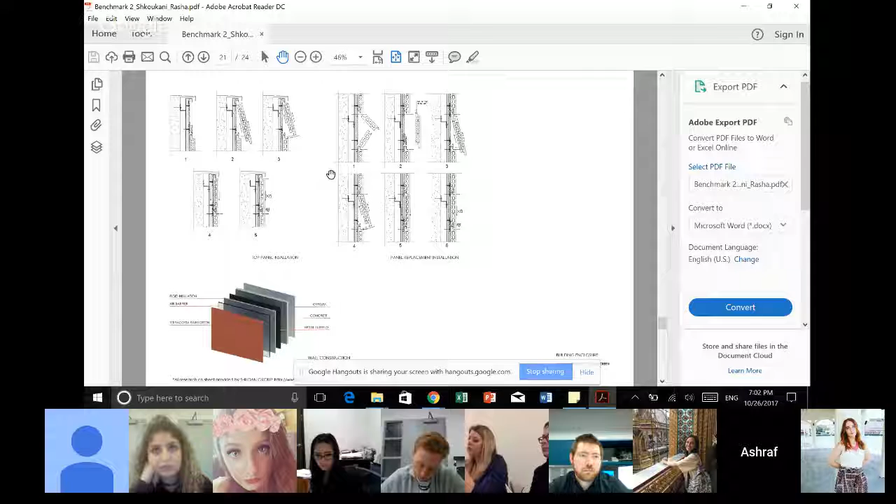There's a range that it can be in. It looks close to me. And then I don't know how you safely egress off the side. Like you might have to consider the distance it takes to get from inside the courtyard of your building to actually outside of your building.

And the door is going into the stair. If this is the bottom level, or the level you can egress, it probably needs to go in that direction. And then your landing on the left side might also need to be a little bit bigger.

So if all that works or not, I don't mind your parking configuration. It makes sense for the cars that you have.

But on the parking plan, the stairs, for instance - like we spoke with Paige - they don't have doors. So it's hard to know how you're thinking of the stairs. Some indication that there's doors, some indication of what you're thinking when you look at the ground floor plan. But then we see that the doors are swinging in the wrong direction.

Actually, I'm screen sharing now. I understand, Rasha, that these difficulties in your garage are due to the strict, I would say, if you want to use a flat plate, the efficient range is between 7 to 9 meters, which is around 27 to 23 to 30 feet, or exactly 29.5 feet. So I understand your pain here.

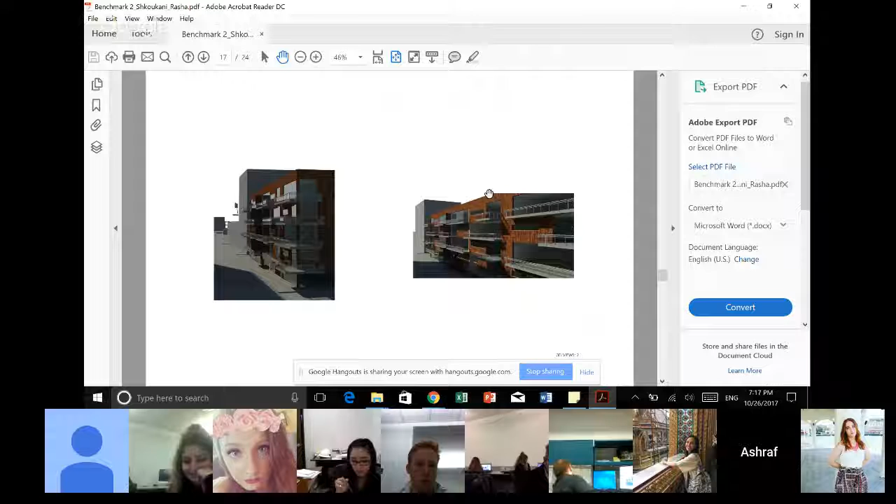However, you managed to have a very nice looking building. I would love to live in one of these if I'm living by the Nile. That's wonderful views here, so you solved this very well. I wished you could have elaborated more on the terracotta.

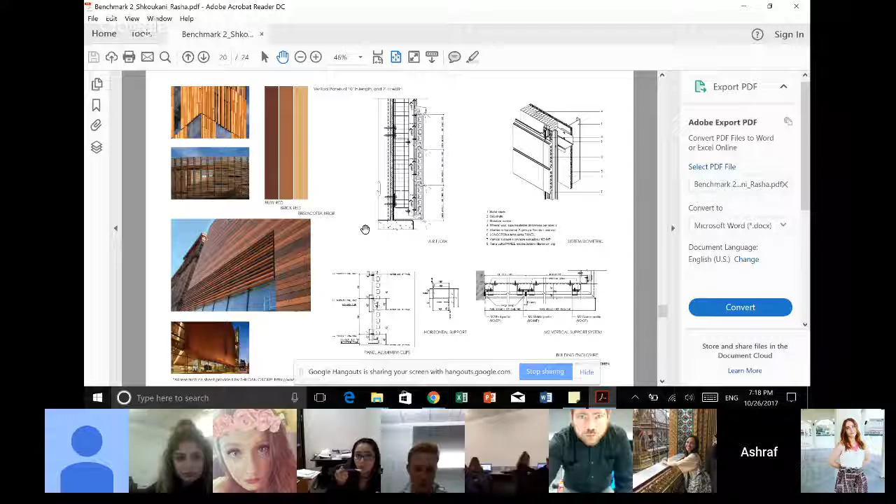You need to show me the drainage of these horizontals, and I can see here that that's the right one. That's a steel stud. I'm not sure if you're going to decide on putting batt insulation inside. That's your rigid insulation, around 2 inches. That's correct. I love the color scheme very much, but I would love also to see it on your 2D elevations here, right?

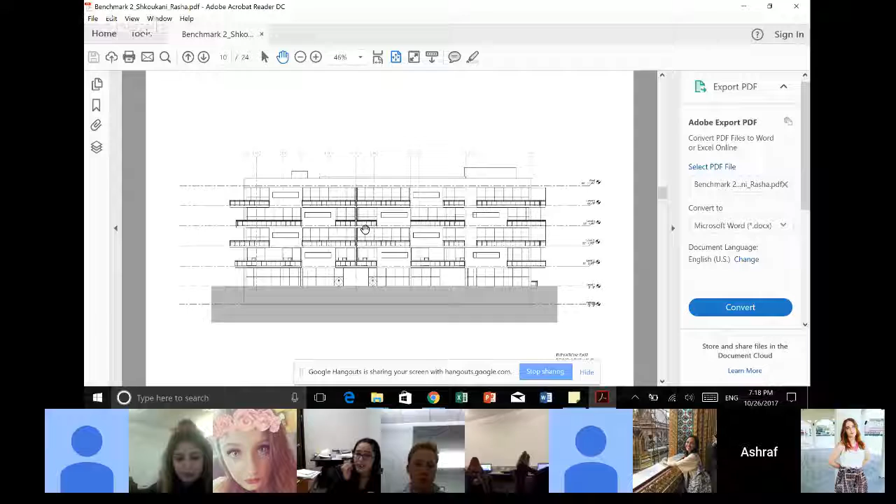I think this makes up a good project. I don't have any problems with the cantilevers as long as it's concrete. Well, slightly weird a little bit in Michigan because of snow and all this kind of stuff, but absolutely gorgeous seating, view, and time.

Starting April to September, October or something. The HVAC, I'm not sure how you're going to bring the duct from this mechanical room. I don't see any spacing here. Probably you've got to find another place for your meter rooms.

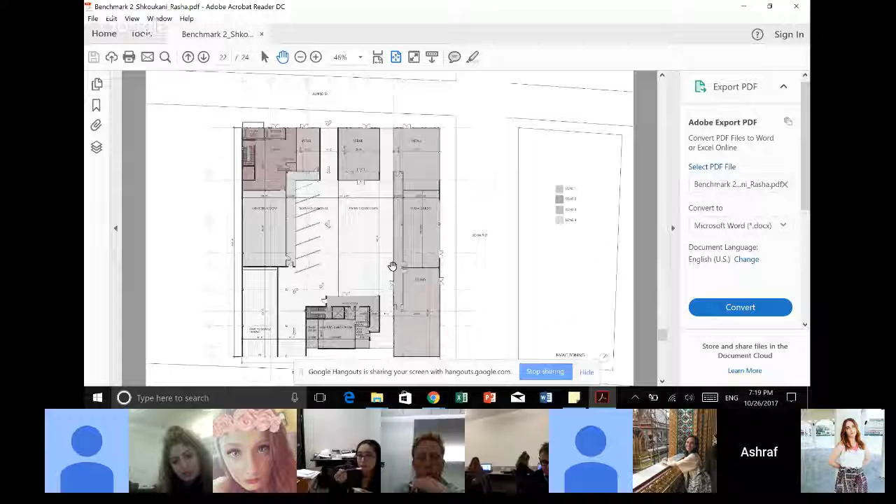Zoning at the end, you did do one zone for the exercise room. You have kind of too many here, like 4 VAV boxes for each zone. It's kind of hefty, okay?

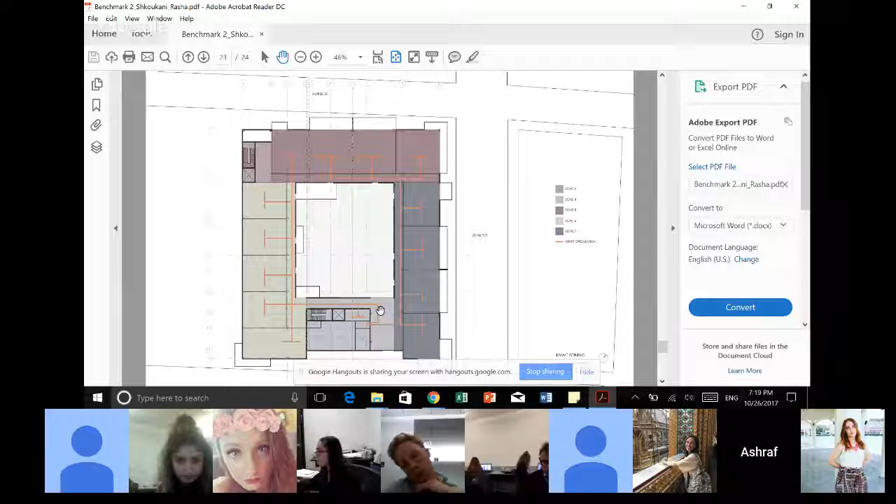So I would love if you can reduce the zones here on the first floor. These, again, 4 zones is still too much. Rasha, I would do 2 Ls here, okay? One is this one, and the other one is this one, probably. So north and east, south and west, that's the best orientation.

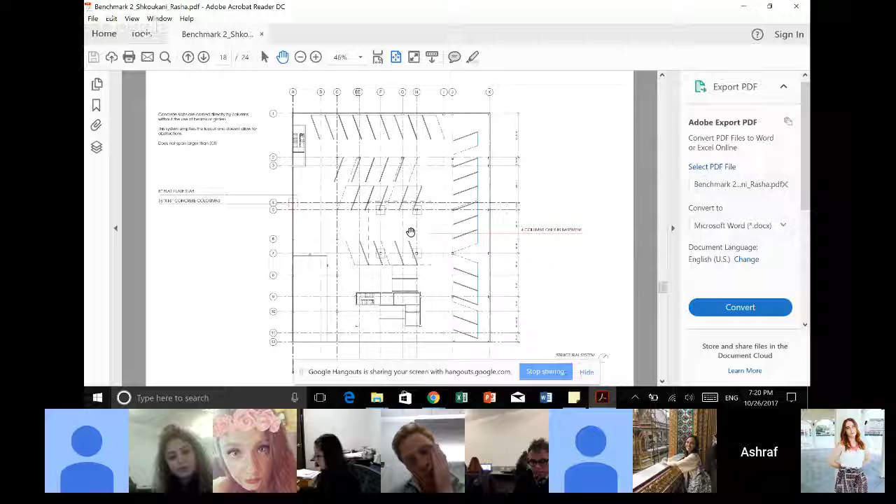And what else? Just wish to have more of a wall section to discuss the code and ASHRAE on it. Your structural plan, I'm not sure if these are beams or there are no beams here in the flat plate, okay? So I'm not sure what these lines represent in between; you simply have columns and the outline of your slab. I hope you can put some thicknesses if possible. And nice 3D graphics. Thank you.

Rasha, do you want to talk about the structural slab drawings? You want to clarify that for us? Yeah, I'm just...

So yeah, there are no beams. It's just flat, because I was doing research on the flat plate slab. So because I didn't know if it was an embedded beam or if there was just no beam at all. So when I was researching, there's no column—why is this slab this thick instead of a thinner slab?

So I've not used the word flat plate slab before. Is that post-tensioned? No, let me clarify this. It's not—it's a site cast, on-site cast concrete mark with 8 inches. This has no beams, just compensating for the beam.

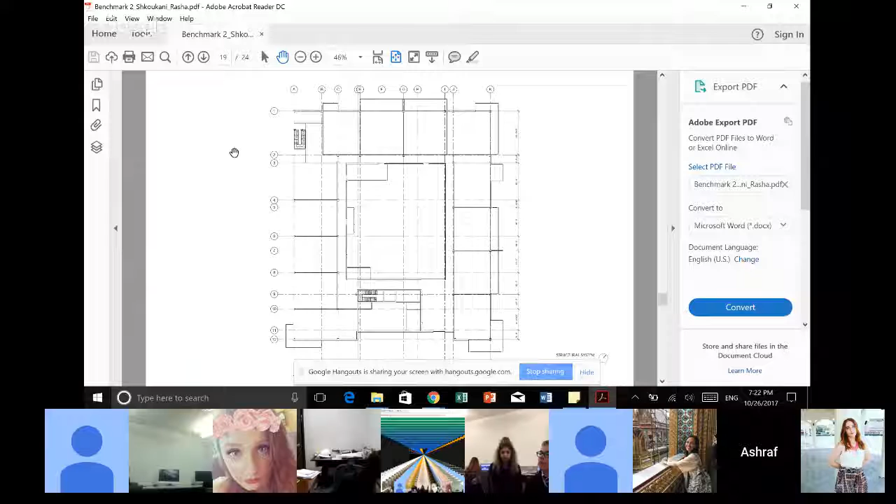If you have really a regular squarish bays of concrete, this will make your life—I mean your structural engineer's life—easy. It should have square columns or circular columns, because rectangular ones are not ideal due to moment of inertia on both sides, lateral forces, stuff like that. So they act like diaphragms for your floor slab.

Do the columns have mushroom caps? No, that's... okay. There is a difference between flat slab, which is the one with the mushroom or plates around the column to resist punching forces, and the flat plate, which is just one plate thicker than the flat slab. So there are 2 systems here: flat slab and flat plate slab. So she's using here the flat plate slab. This is why she was restricted. However...

Any structural engineer, Rasha, will ask you, okay, for the first floor, or the ground, the roof or the ceiling of your garage, to be done as beam and column. Okay, that's for more of a fixed moment analogy with the steel connection. So you do have more rigidity for your building. So you will be asked to have a beam and regular slab on your first floor, on the garage floor.

Other than that, I would love, Rasha, to see a 3D of the slab, kind of an inspirational photo, like what you did with the terracotta. This is very, very helpful to our final jurors' explanation, to explain the concept and show what you're trying to say here, not just a structural plan like this. So it's better to have more of 3D sections and a couple of inspirational photos like what you did with your terracotta.

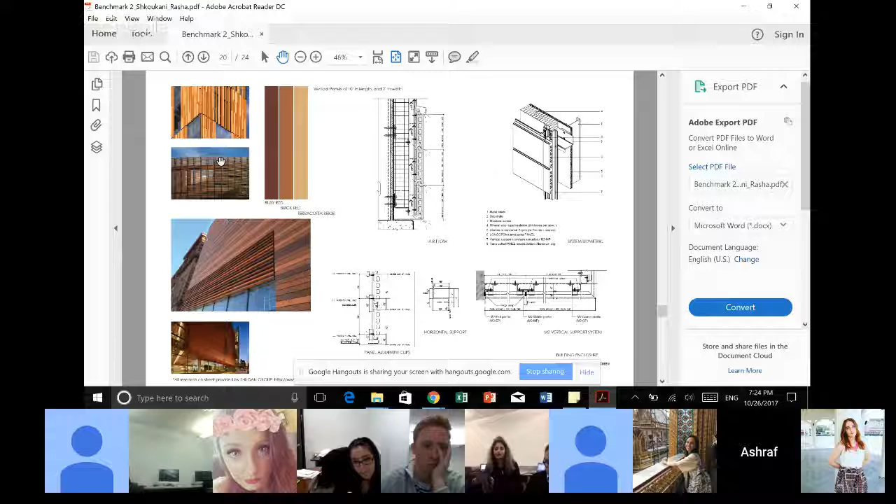So for my basement, because we talked about this, I recall the basement has an embedded beam, so you don't actually see it—it's within the floor, the concrete. Well, I know that beams bother us a lot, but if it doesn't... again, this is a structural issue, so don't worry about it. I'm just telling you because I see here the progress, Rasha, in transferring a good design of some sort. Again, I'm having some issues with these wide balconies.

It's more luxurious for Detroit, but I'm so happy to see the development of the design with these systems in mind, especially the structure and enclosure. This is really what we are looking for. When I see you maturing like this, it makes me very happy.

Don't worry about the basement floor, but I'm telling you, you will end up with just a regular beam and slab here, which isn't a problem. You have a very nice structural plan here, base, almost squarish, less than 30. That's a heaven.

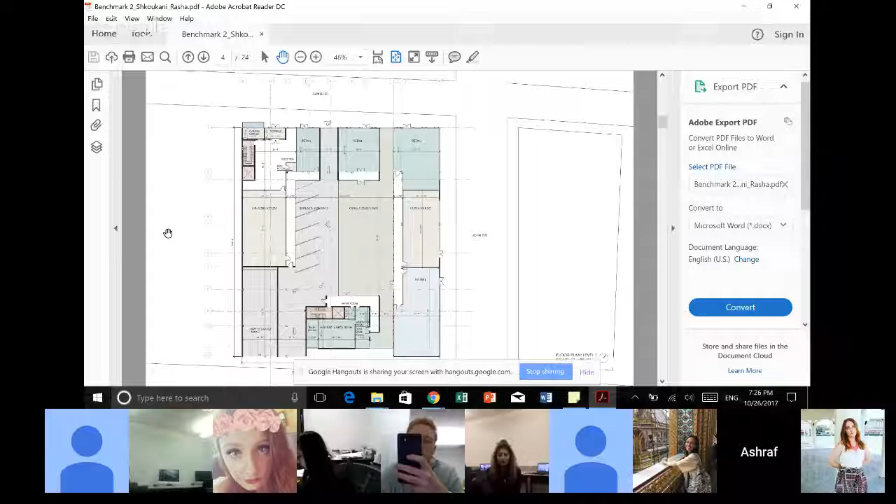I'm just a little unsure as to how to actually show it in my plan, to have my structural system be clear. We can do this together, don't worry about it. You mean the structural floor plan here? For this floor, yeah, but for that floor and the residential floor I just want to make sure the jury understands.

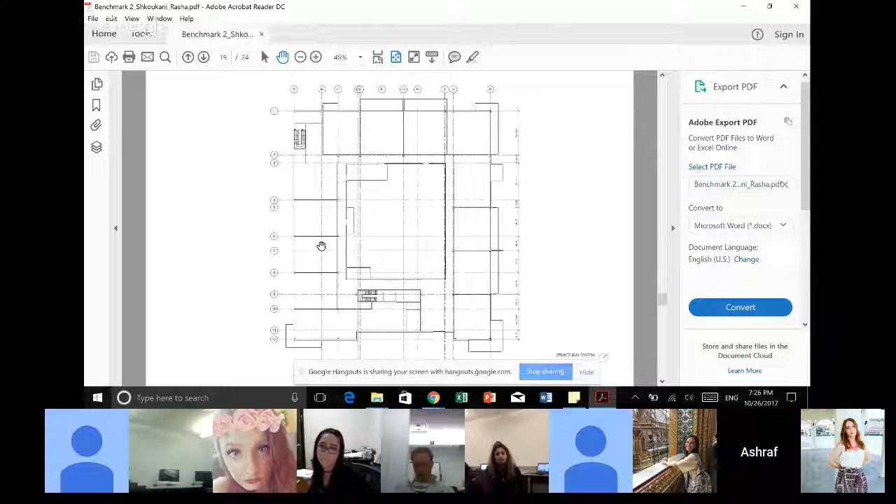No, the residential floor is good. Just show the columns, no beams here. Okay, and add some explanation.

3Ds, axonometrics, or whatever for this construction type, and make it clear that this is a flat plate slab. You just need to add some illustrative photos here for a kind of analogy or inspiration.

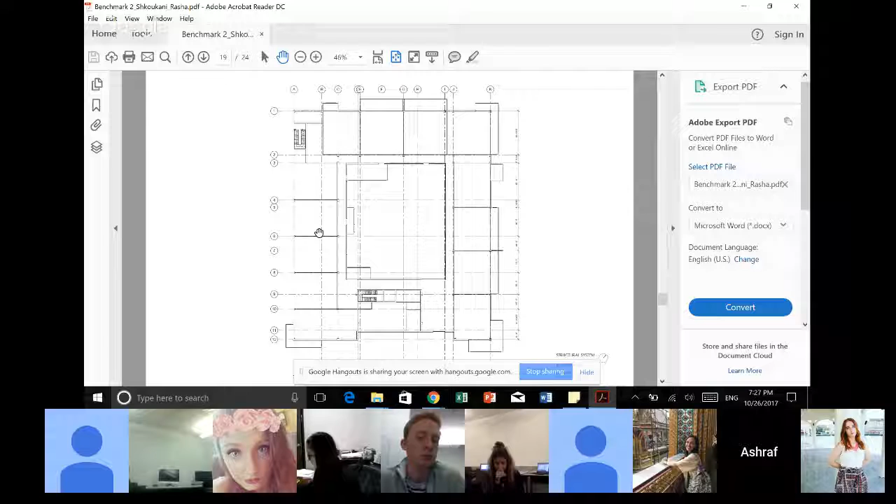Concerns about the first one we can do together. That's fine, that's an easy task.

I was researching it, and a lot of pictures ended up showing what you were talking about. I wasn't just looking for that, so I might end up having to make it myself, because I think what's more popular is the mushroom cap as opposed to the flat.

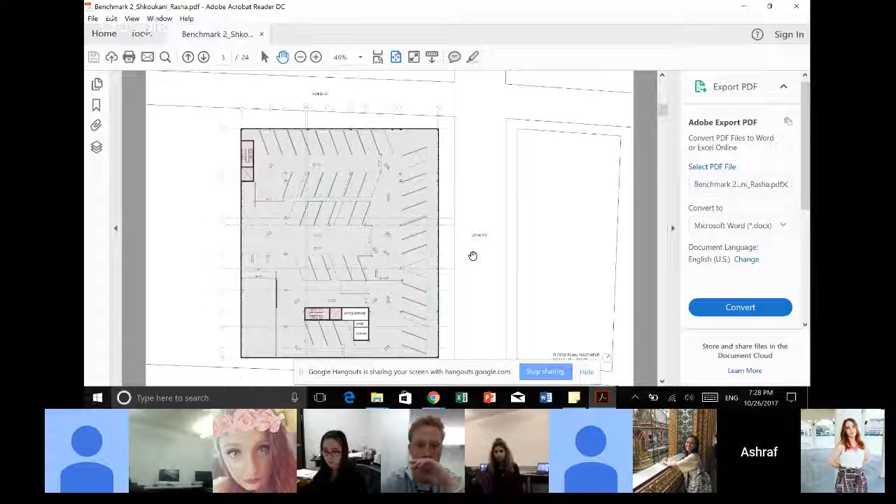No, flat plate is different from the mushroom cap. There are too many embedded systems. There's waffle slab, there's flat slab with the mushroom cap, there's flat plate, there's what we call ribbed hollow block or ribbed slab, which uses light blocks to save on the concrete. So there are too many of them, but that's a legitimate system and works very well here with these regular span distances.

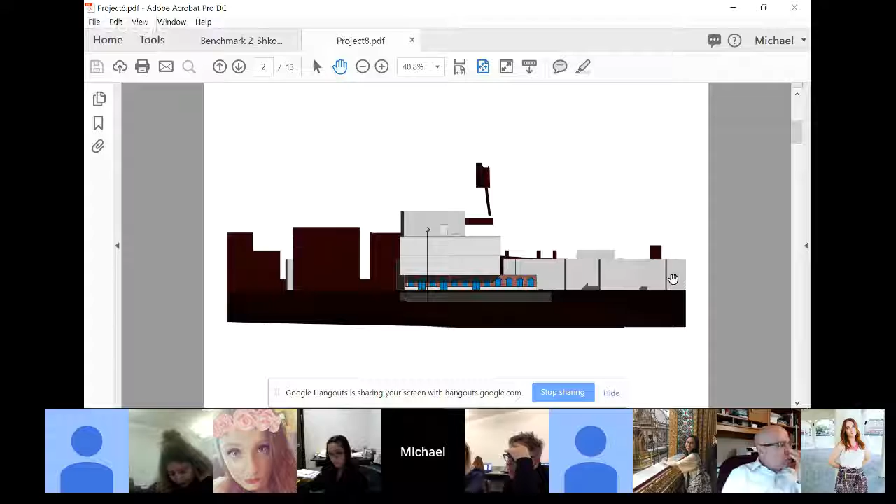So, first elevation, this is looking towards Woodward right now. The top 4 floors are all of one construction, a combination, and the bottom is where all the retail and other spaces come in. So it's created differently, and you can see that through all 4 of the elevations.

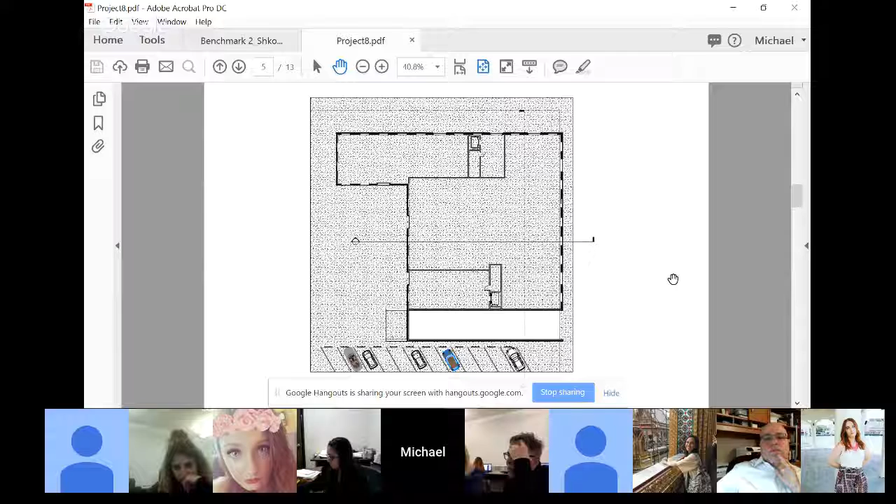If we go on to the floor plans here, the floor plans are very open, with flexibility of space. I need to adjust my staircases since I made some changes to the upper floors, they're not going to work for egress.

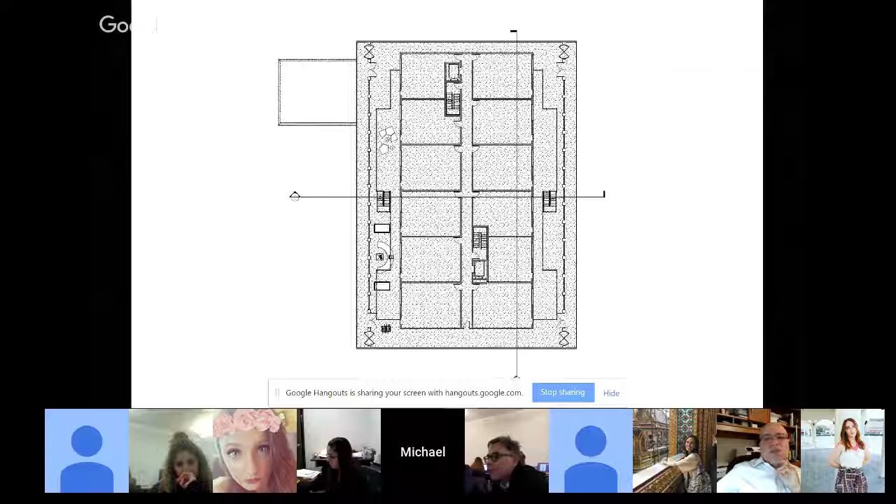If we go to the first floor plan, or the second... Mike, could you please indicate the page number when you talk? On each slide, I can follow up with you on the page.

On the exterior of these rooms there's a very large atrium that you enter through. It would essentially be the front door to the apartments, and creates more of a community feel.

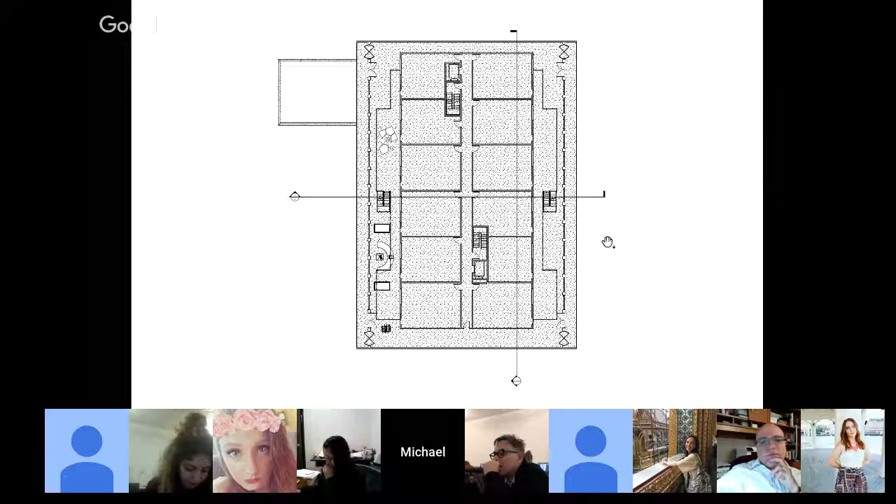My current plan going forward is to take these 2 and bump them out to the outside of these units, and then this hall will be completely erased. It'll be replaced with one wall that in section will be vertical and support.

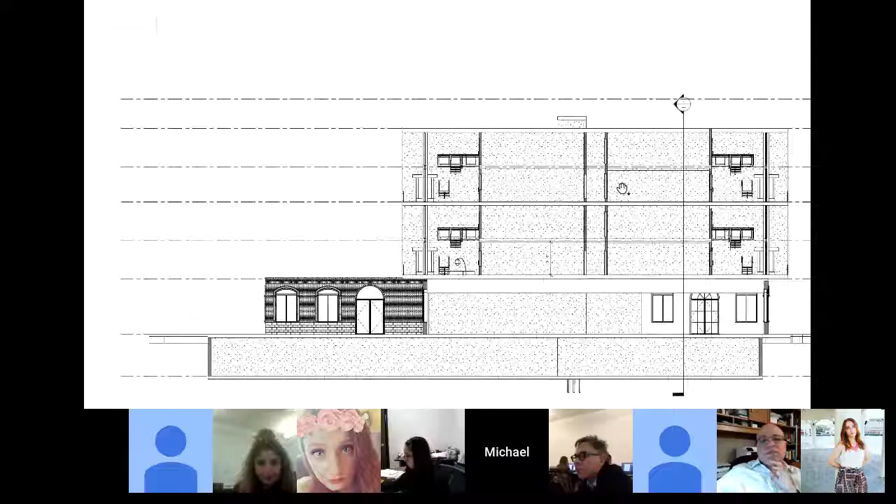If we move on to the sections here, the first sections, you can see more of the space that I'm talking about. You can see 8 units in the section, a hallway in the middle of all of them, and then on each side is an atrium space.

No matter what floor you're on, you have access to an atrium space that's not only shared with everyone on the floor, but also everyone on the floor either directly above or below you. The structural system now becomes a lot simpler.

I don't know about that. It was just a thought, but it...

Gives you the opportunity to create a balcony space, this atrium space that's all shared. I guess it's not a mezzanine because it's not a half level, but the interior balcony, I suppose you would call it, inside of this curtain wall.

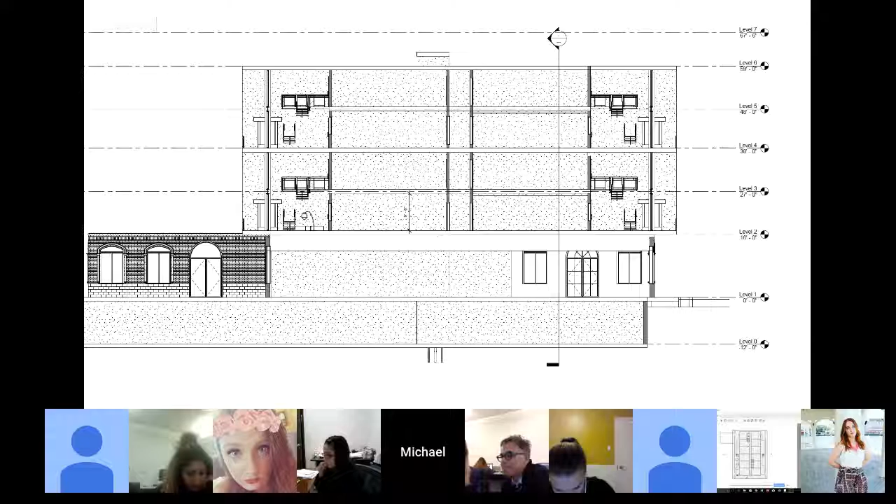And then columns line up directly with the walls on the first floor. So all of the load from that would be transferred and then eventually into the structural system. But it's all a very square grid, so even though it's not fully worked out, it shouldn't take too long to do. And then there will probably have to be a column in the middle of the hallway.

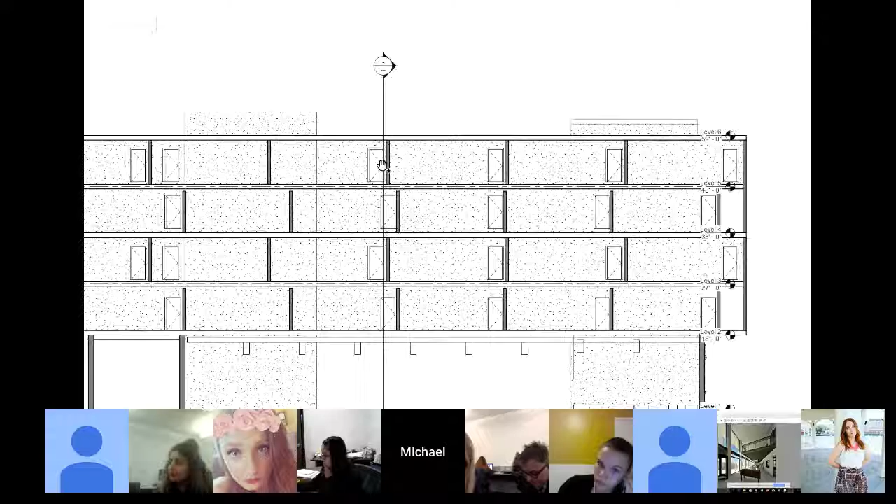Moving on to the next section here. This is a section through that hallway, I believe. No, this is a section through the rooms facing east. So it's a section facing east.

So it hangs on each side, but they're not incredibly long, so they're going to be cantilevered. Entrance to the left.

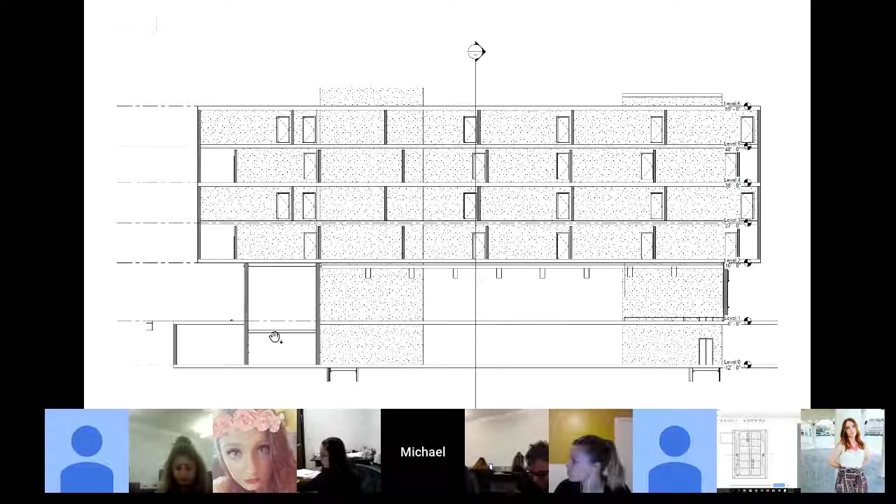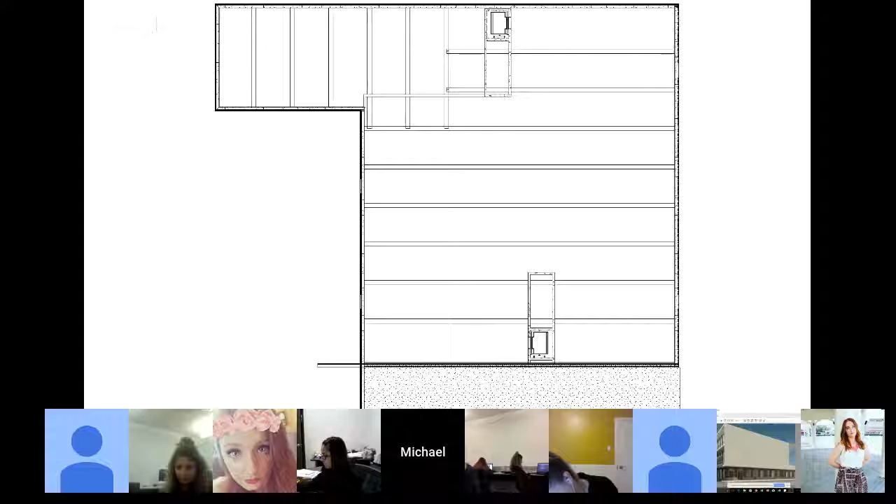Is a quick look at what this atrium space could look like. You can see on the right all of the rooms. So you come in, you have space to get to your room, and it also opens a sense of community.

And since we're building for baby boomers, they're most likely going to be coming from home. The thing you often miss in an apartment is the ability to have a neighborhood, to have a community. You get these tiny homes that they're doing for homeless people. They aren't putting kitchens in because they're making community kitchens, so people interact.

And with this forcing you to interact, you get this very nice space, this double height space the second you walk out of your room. Lounge there, you can go up to the window, enjoy the sun, go up to the bean bag. And so it's a way of re-envisioning the hallway.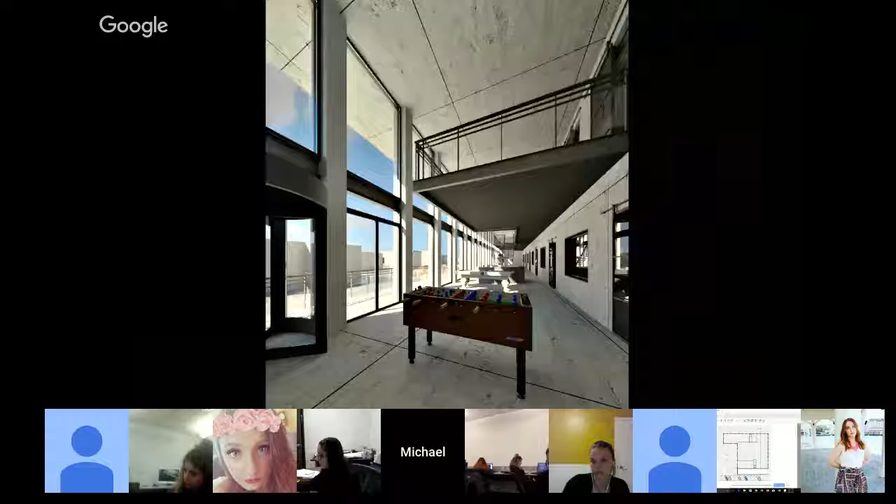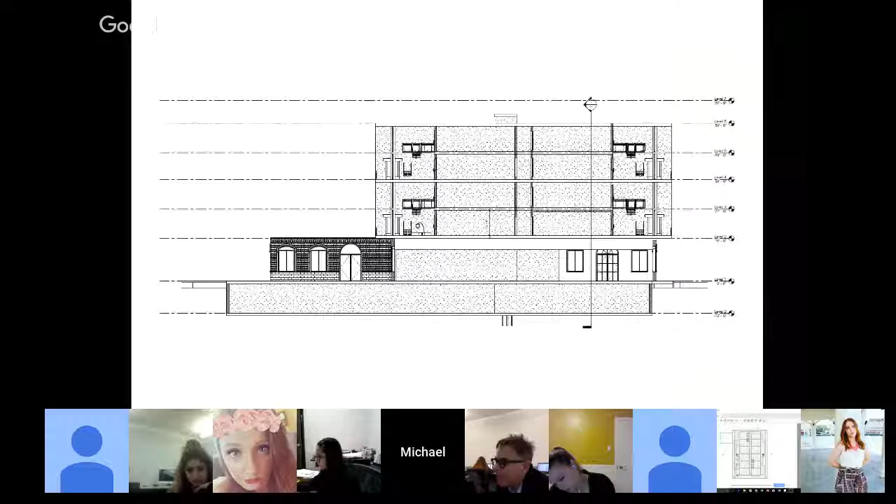So you have this open volume to the other side on each end on the first floor. You can see that from the first floor plan. Access to both sides. On the second floor plan, it goes straight into it, but this atrium space essentially completely surrounds all of the units, and so it's kind of like a house.

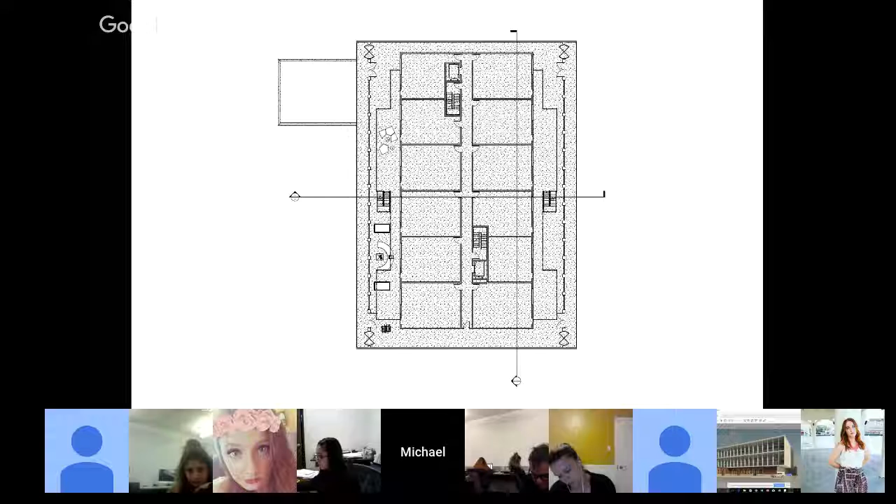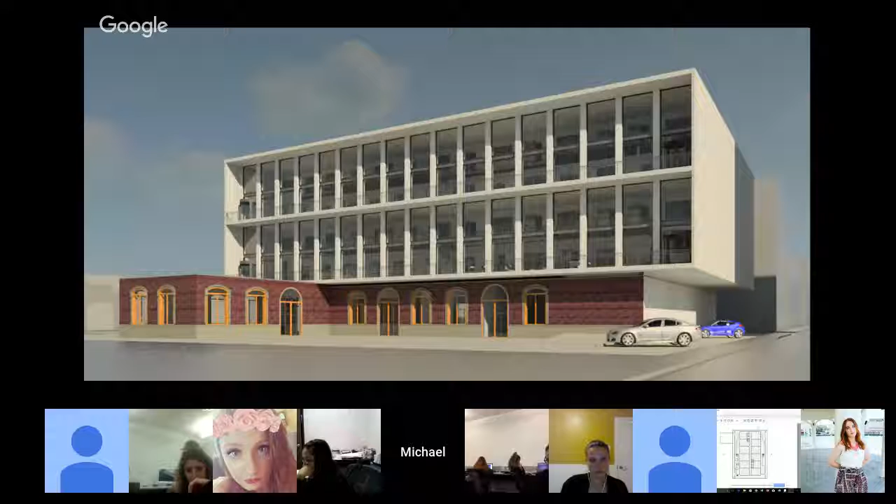In the final image, the view from the south. This is directly looking north at the building.

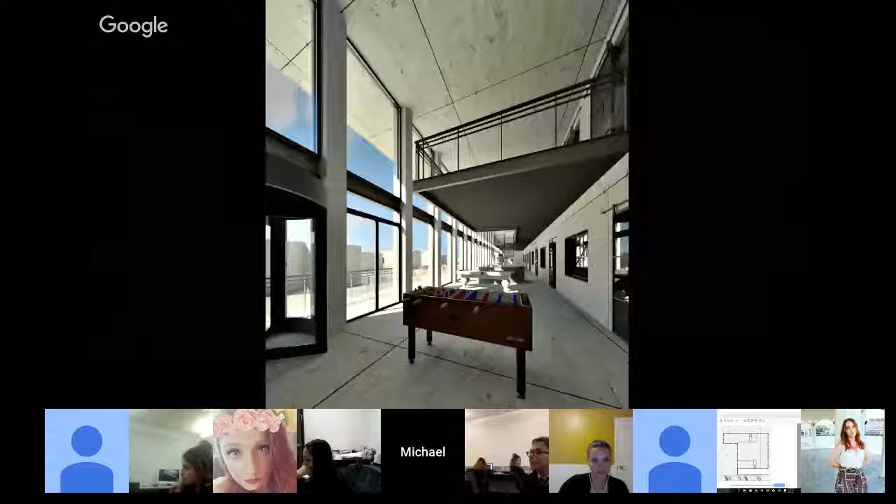You want to go first? Wait, let me mute. Okay.

I think you already noted some of your items about your stairways and where they need to be. I think one thing that you mentioned when you were talking to us is about this connection on the first floor, but you're showing something like very opaque in your rendering. I feel like you're going to have that same scenario you were trying to avoid, of going down a corridor that maybe goes somewhere, maybe doesn't go somewhere. You're connecting to ambiguous spaces.

You do kind of realign to that center wall, and then you have these balconies that connect. You end up with, I believe, 12 families, kind of a neighborhood, with I think 6 residences on one, 6 on the next level. You can't get to the other side at that point, so you're many neighborhoods in your own building, which is kind of neat.

I would consider... I did like how you talked about who your tenants actually were and their interaction in the space. I'd love to see people in everyone's renderings, just so you start thinking about how you're moving through the space. And then the other thing I did want to consider, though it was easy to tell what materials you're using, the first thing I saw when I saw your rendering was the floor.

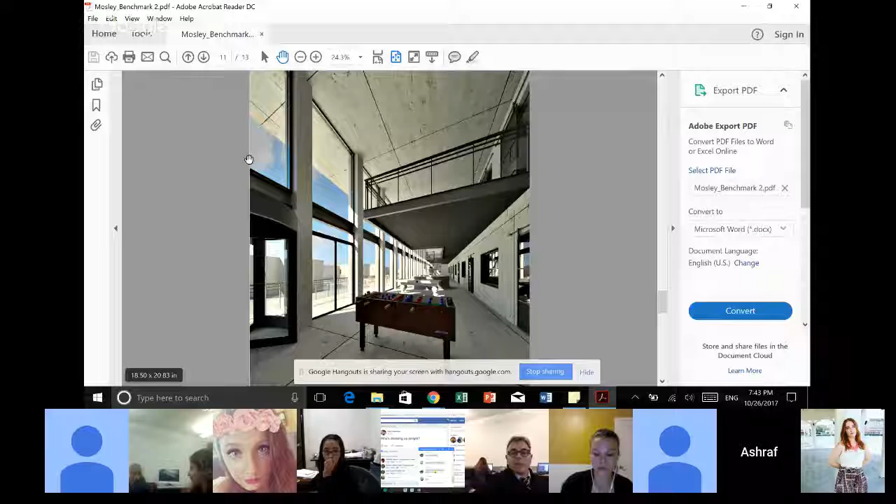So, Ash, would you like to weigh in? Do you hear me? Let me just check a second here. Do you hear me, Mark? Do you hear me? Everybody hears me? I can hear you. Yep, okay, yeah.

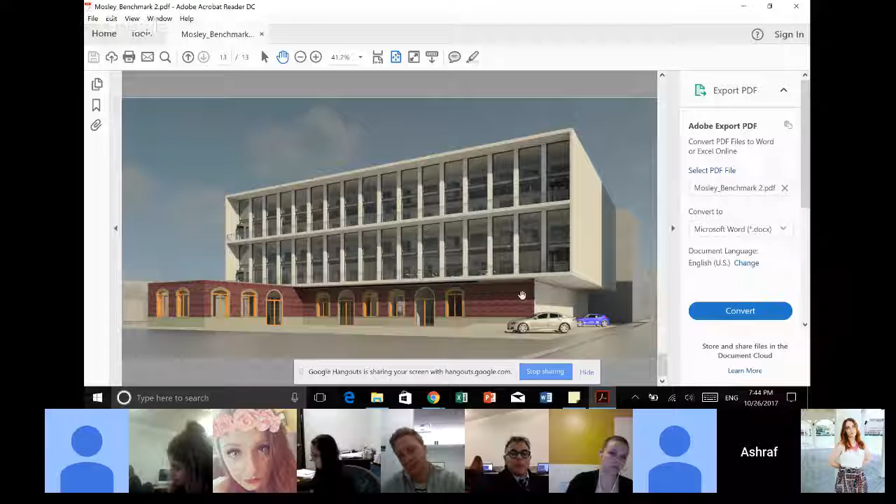Okay, I think it makes to me a good architecture here, Mark, what you're trying to do. I don't know why you kind of drifted from this nice flat arc thing into segmental, semicircular. So this looked to me like a completely different project. While if you had kept this nice flat arc, kind of a repetition to this, that would be a wonderful elevation. Again, that's elevation only.

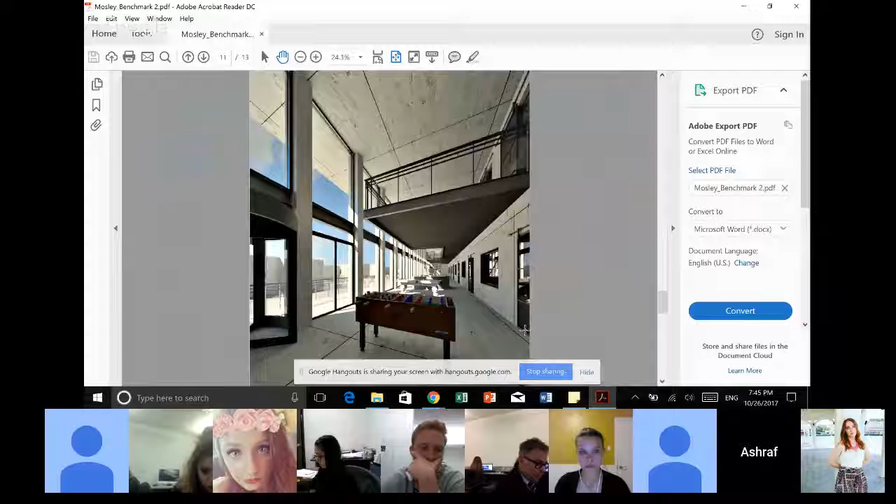Same thing here, if you had kept these flat arcs here, that would make more sense, instead of going completely different, using a completely different vocabulary here. Again, I'm not commenting on the design and the massing here, but it's really very ambiguous to me what your structural system is. So what do you want to use here - precast or site cast, or what?

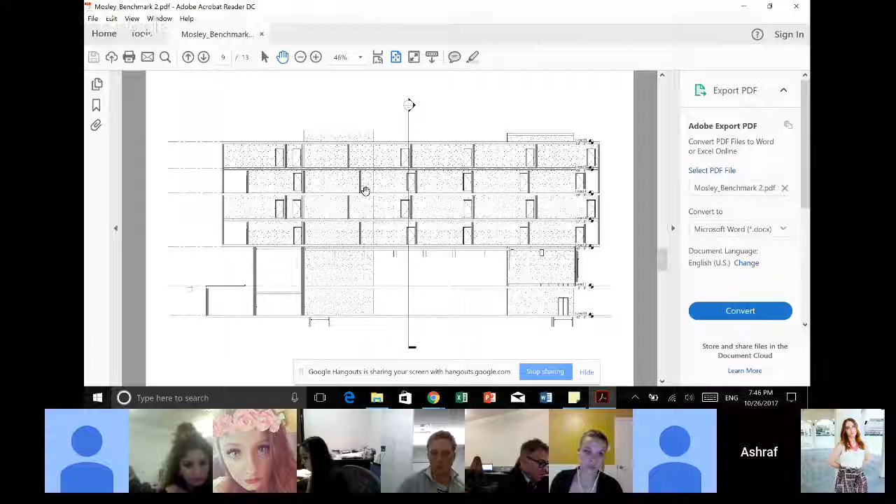I was thinking site cast. Site cast, so I need a module here, Mark, in order to... and if you use site cast, what kind - is it a simple beam and column, slab? I don't see this here. This is very ambiguous, and I don't see it here either. Still some beams here from this floor to this floor, while there is no beam for the garage and no beams up here. I know that this might be to hold this nice box that you have of residential, but it's still very premature to me, the system that you're trying to use here.

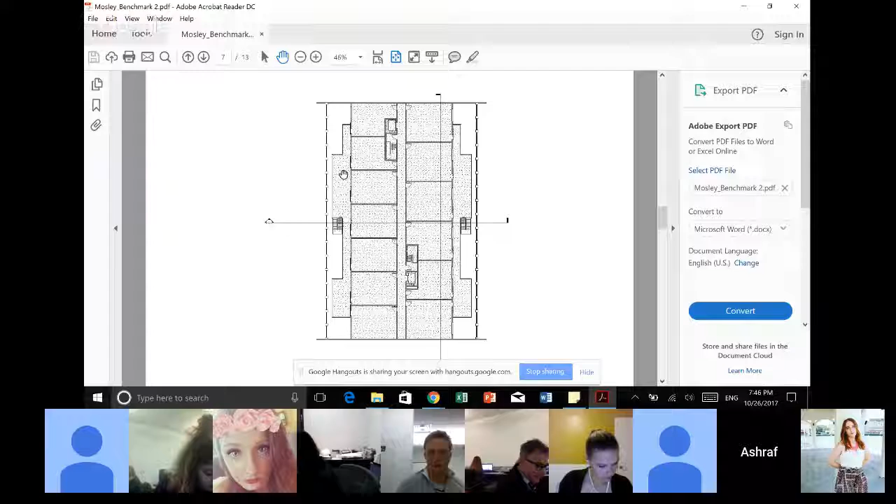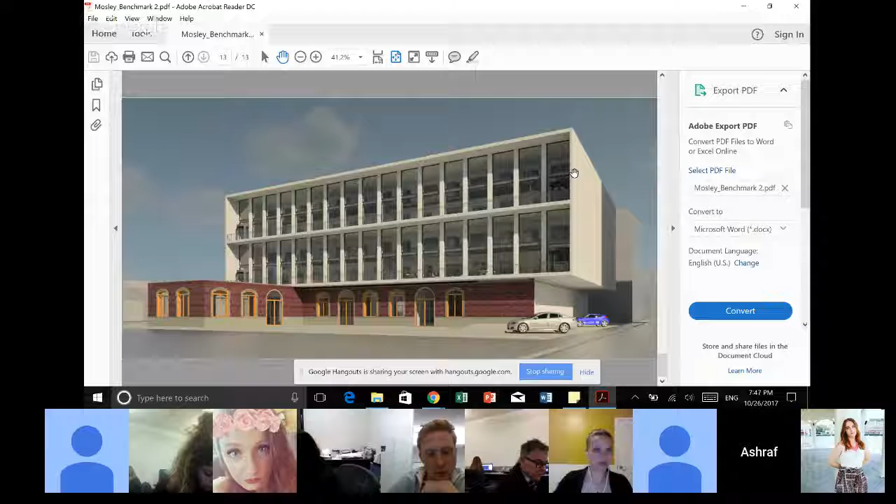Same like Caitlin's comments here on these terraces - it's nice to have community, but I'm highly concerned about the privacy here. This would require you to have a certain type of glass to prevent these people from peeking in here, so this will simply reduce probably your amount of glazing in order to achieve this privacy. I would have loved to have the units going all the way to these nice flat arcs, instead of having these kind of terraces inside.

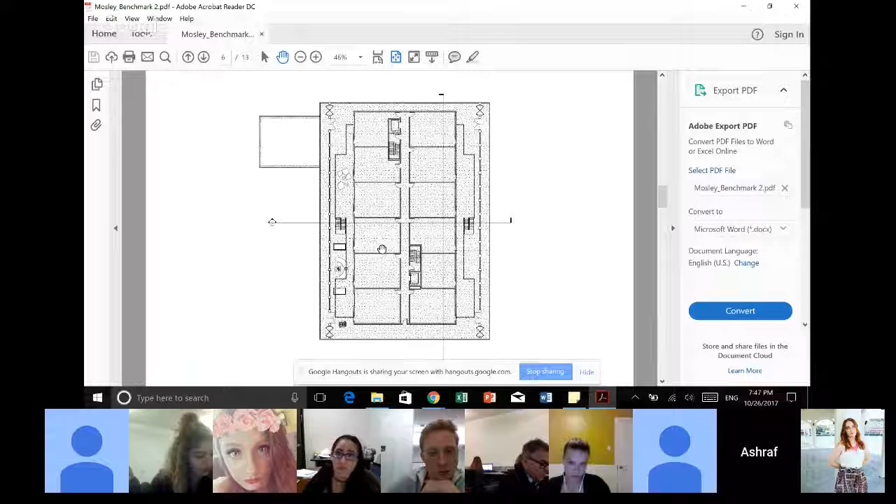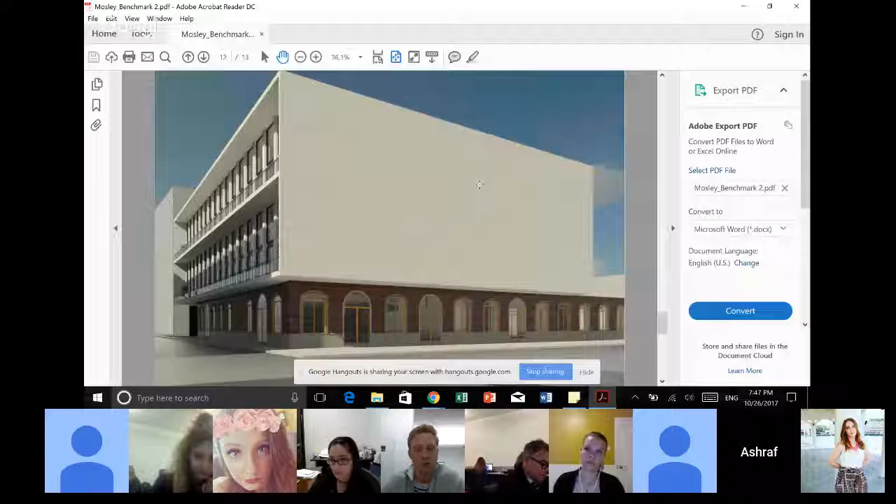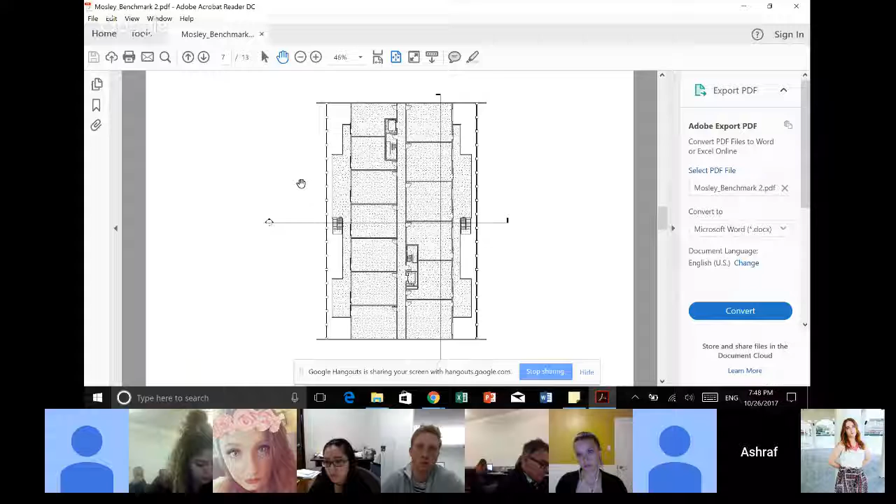Still, I need more information in order to judge your HVAC. You haven't considered any of this here. I don't see any concept of your HVAC, so that's simply zero today. The enclosure as well - I needed to see how you achieved the code, ASHRAE 90.1 2013. Here, like your other peers, they at least tried to show some conceptual sections, so at least they know what's going on. I don't know how you're going to do this here with all of this glass. It does need probably a COMcheck or REScheck, because that's absolutely more than 50% of the facade area made of glass. So this is very, very tricky as well here.

Thank you. Okay, thanks, Ash. Okay, so I'm looking at all of this, Michael.

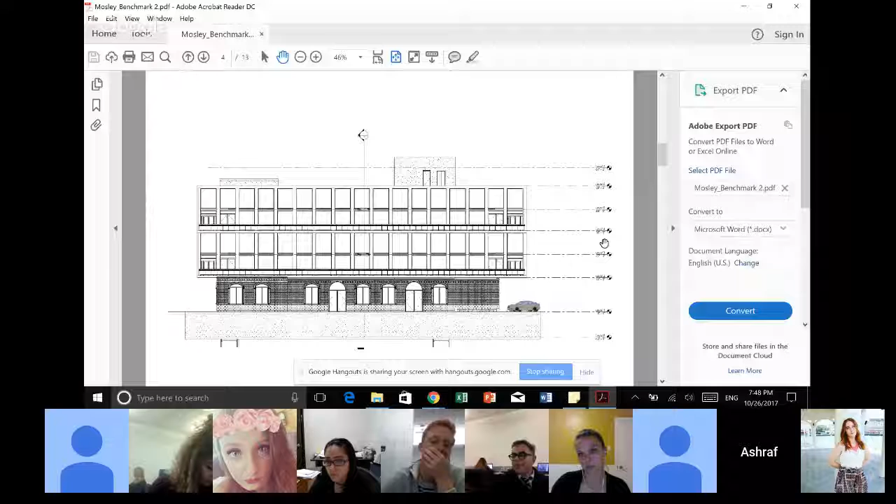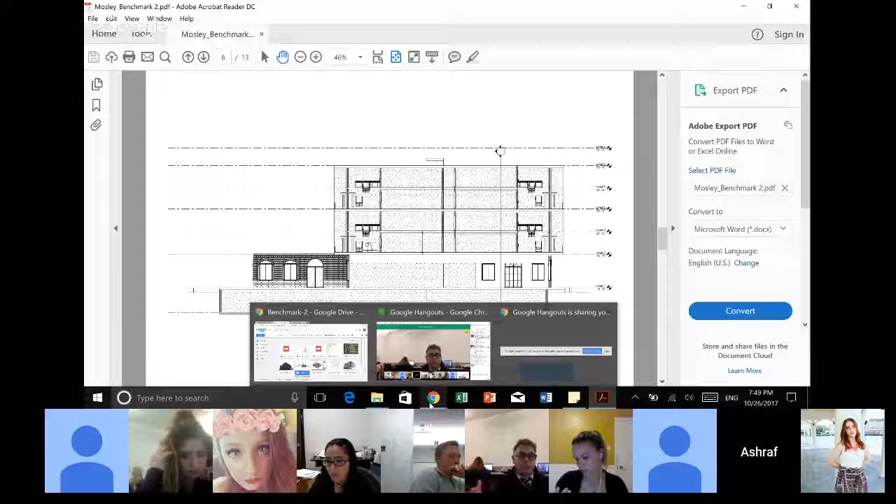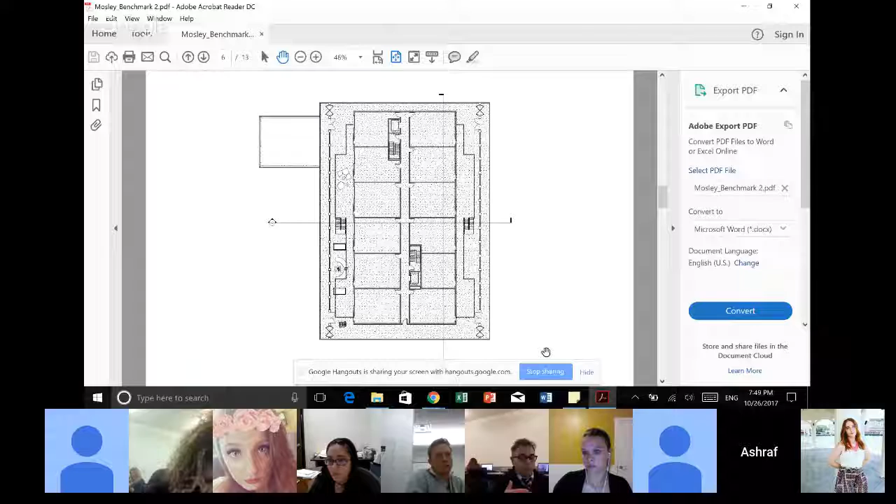Wish that what we were seeing today was something that you had for benchmark one. You were one with this package. I think we could have addressed some of these issues, like duplicative elevators and that sort of thing, and maybe approached the overall idea of the unit block in a much simpler way, and you could have been propelled forward to continue the work.

I'm looking at some sketches I just drew, for example. If we were working in an office together, and the developer said, who cares how much more the stairway costs, they're not gonna buy anything more than what they need. Why would I buy more stairs than I need?

And they don't promote community, for instance. I think what I'm hearing is that not only would I need more stairs just because I've got these grand stairs—what was the word? I think it's called a Grand Stairway. Yeah, grand stairway, they're just kind of like a social stair, right? Like, you're too young to remember Loretta Young on a stairway, or she'd walk through a doorway, sort of like Garnier's Opera House. The stairs were meant for people to see and be seen. And I love that idea.

And your talk today talked the most about that conversation, right, between community and privacy. And I thought that was really interesting.

But there's really no workable strategy for how we evacuate the building in a fire event, because there aren't really enclosed stairways, which we've talked about with you and team members here. Michael, you'd need an egress stair at one end, the north end, and an egress stair at the south end, and that's on the west atrium. You'd need the same thing on the east end, or east side, which would be your John R. side.

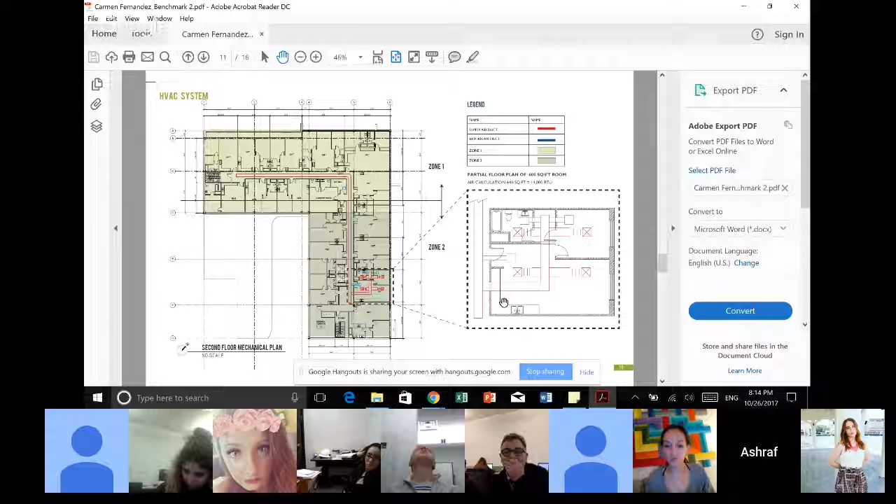It's a very small space, you can treat it as one big room, having the return here in your bathroom. If you are generous, you can have a return here above your kitchen for the fumes, you connect it to the return duct, just 3-4 feet to the return duct. That would be wonderful, okay.

Here, that's my only problem with you, that we may run into code issues. We have what we call NFPA 285, a fire code that prevents using combustible materials for more than 2 floors. It's residential, yes, but we do use the studs and insulation in our homes here, built tight, insulated, right?

No problems at all with thermal bridging or anything. But when you go high, Carmen, with this cladding, the danger intensifies. I understand you try to cover yourself, sorry for the expression, by having a treated counter batten screwed to stud centers. Yes, code says if you use wood in a wall cavity, it has to be treated. That's the code, so you covered yourself well here.

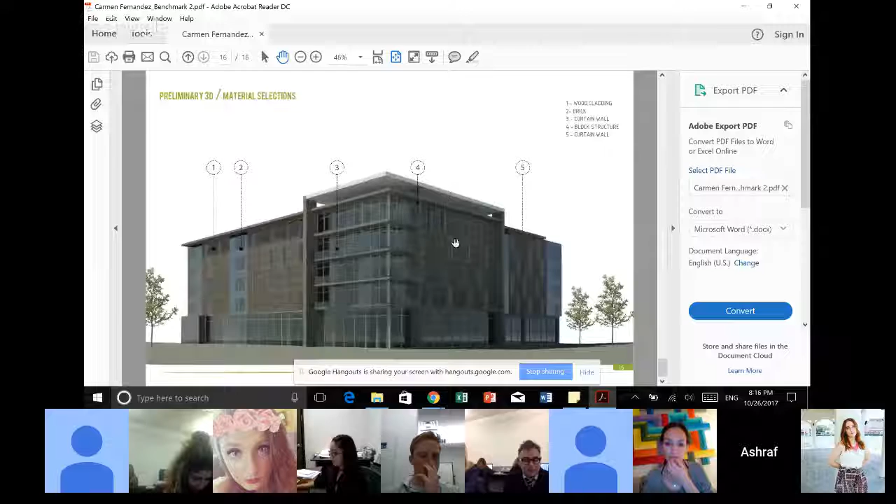However, I'm still, and Mark is the one controlling the design part here, I would go with a metal cladding, try to find a sexy looking metal cladding, try to play with the colors, the module. I posted both lectures on Blackboard, full of details in terms of wall sections and design. One lecture is more design oriented, the other is more detail oriented for your wall sections. Again, it's not bad, I'm not saying change, but...

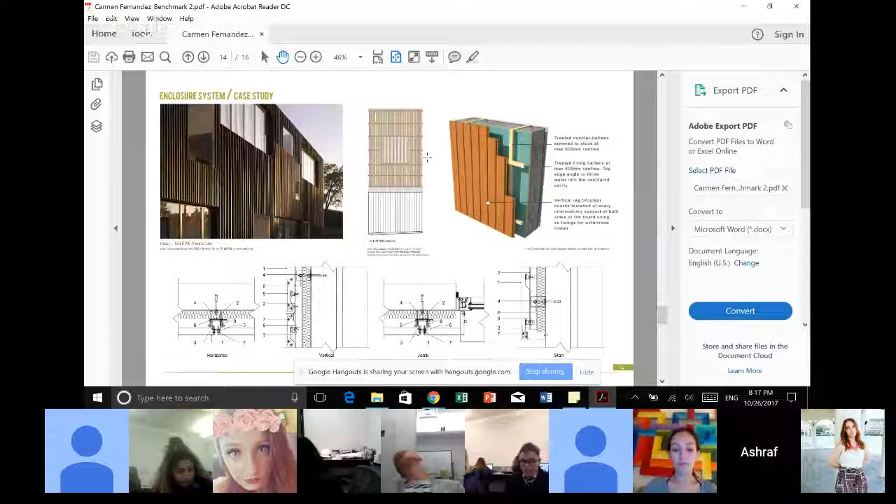Nothing wrong, but there's an article about a building that burned to the bones in England because of this. They had untreated wood and some plastic components that fueled the fire, and it ate the facade in less than 18 hours. They came praising the United States for applying this NFPA 285. So we just don't want to get into some tricky stuff.

I know the developer will love you because it's cheaper, but in an academic setting, I would rethink the system. If we go with the code, we go with the law, we go with the book, I'm okay with it, but I'm just telling you, think of something else.

Last comment: I like the 3D, by the way, very nice. This is not a curtain wall. A curtain wall goes 2 or 3 floors high; we call that a storefront. This nice number 3 in your 3D here, that's not a curtain wall. It's storefront, ribbon glass.

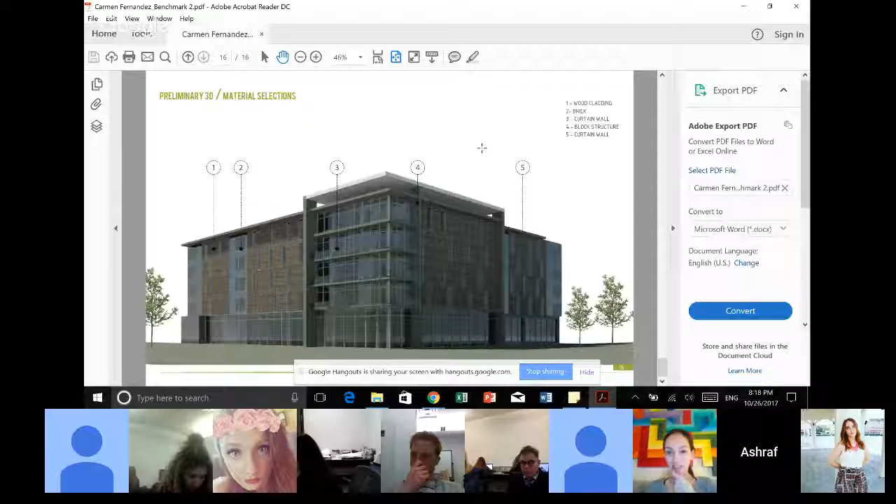So we use what we call storefront sections in aluminum to erect this floor-to-floor height. You did send me a presentation on that, so I'll get that changed. Okay, I'm very disappointed with your wall section. Oh my goodness, that's not... I needed more work, I know. No, yeah, it's not good at all. It doesn't show me the enclosure, it does show the structure, but not the enclosure.

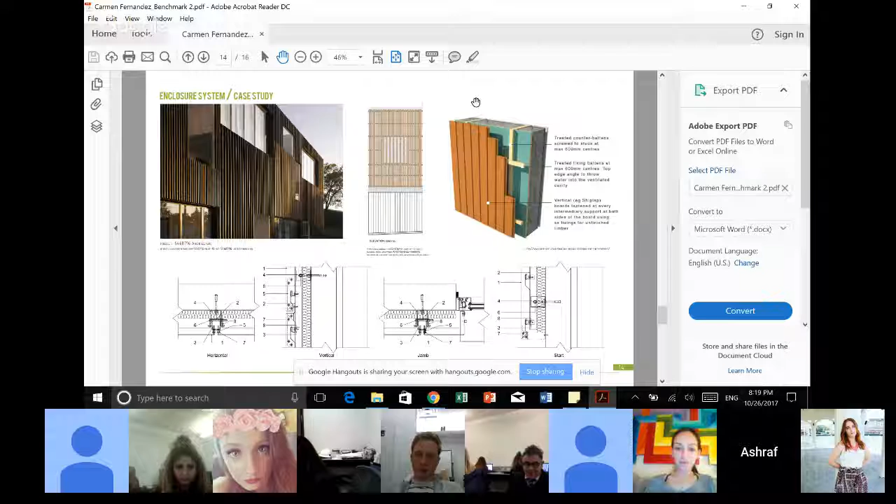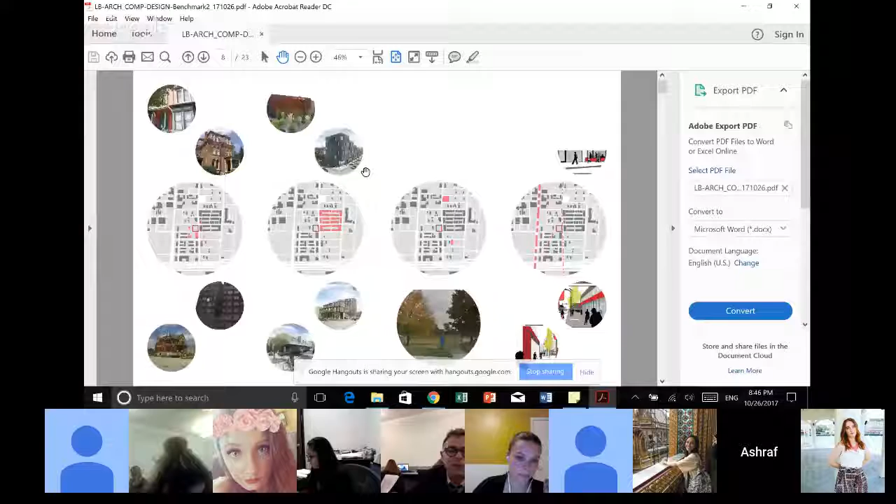So, Ash, do you have anything you want to add? Very quick, Len. I appreciate the effort so much - you're just bulldozing this project. A few comments here for this one.

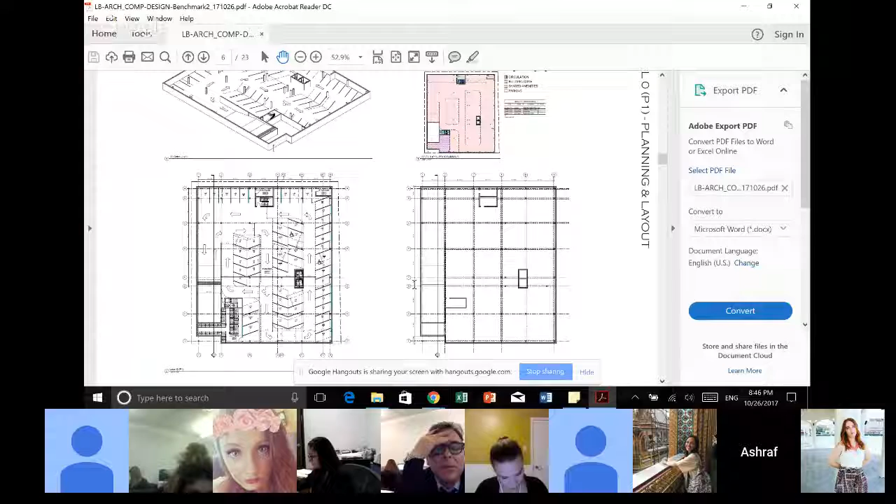Just please turn - I'm screen sharing here - please turn these dash lines into continuous lines, and you'll be fine, these are your beams. You don't need to size them or anything, although we have talked about the sizing of concrete beams. But to me, that's a perfect sort of squarish, very regular structural system.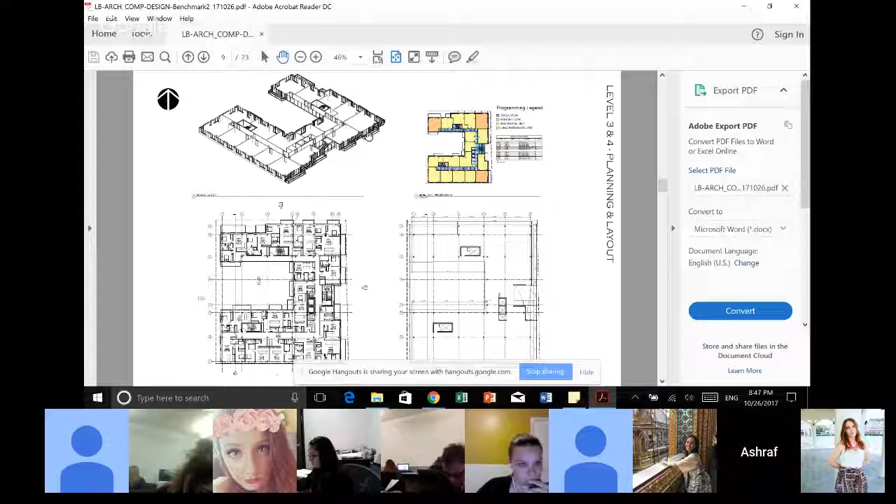I have looked also at the floor plans - we have looked at it, I have looked at it before, and it's just very, very nice. The HVAC, I have no comments, although I would love, as you did here, probably as Carmen did for one unit, for it to be wonderful to show us the supply and return. Just one unit - you don't need to do it for the whole first floor, it's too much.

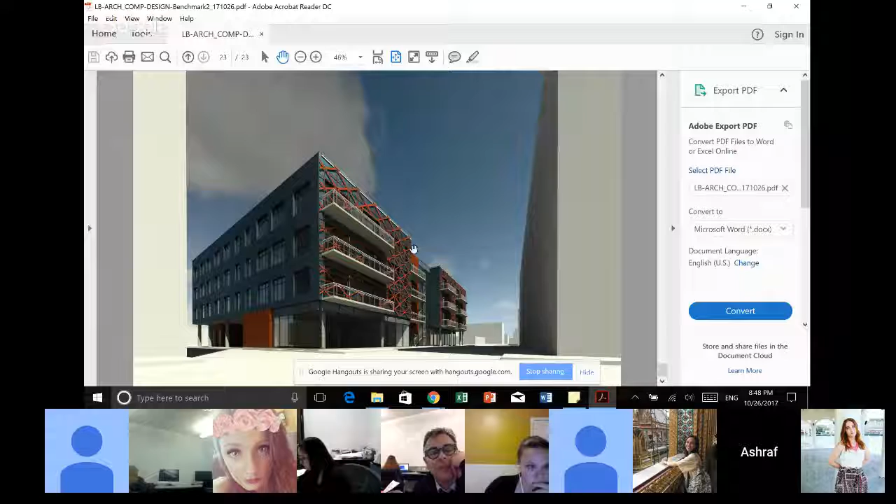What else? I share the same comments of Mark here and Lindsay regarding this steel mesh. I would look at this 3D here. This is a good start if you want to reconsider, but again, the maintenance issue of this steel is an issue, although it looks beautiful. Don't get me wrong, it looks very beautiful. I think that's a good start here with the color scheme and then the slabs.

The balustrade system here, glass balustrade systems. Another thing to help you with: see here what you did in terms of lining up the seams in your elevations. Okay, kind of compatible with the mullions. This has, so here that's good.

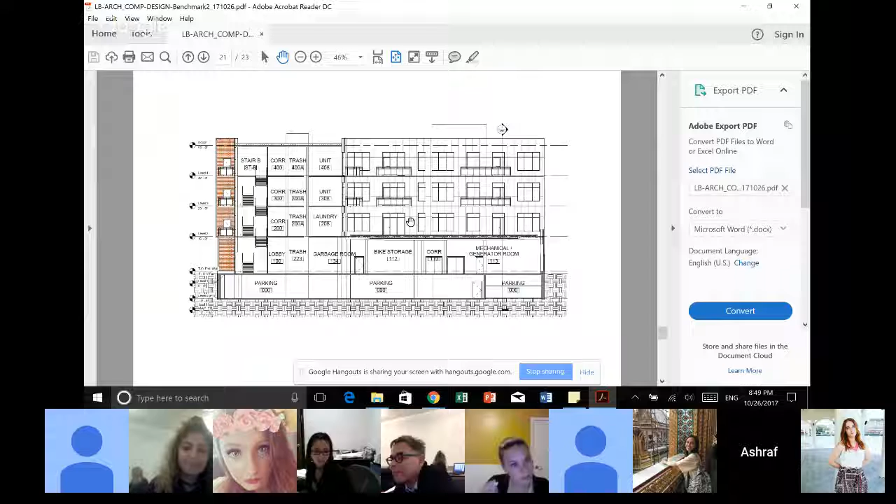This guy, I don't know. This guy, of course, it's off the mullion line or the module line of this. This is good, this one, same thing here. We don't do that here, Lynn. That is, if we have a metal panel here, this matches with the top of the window.

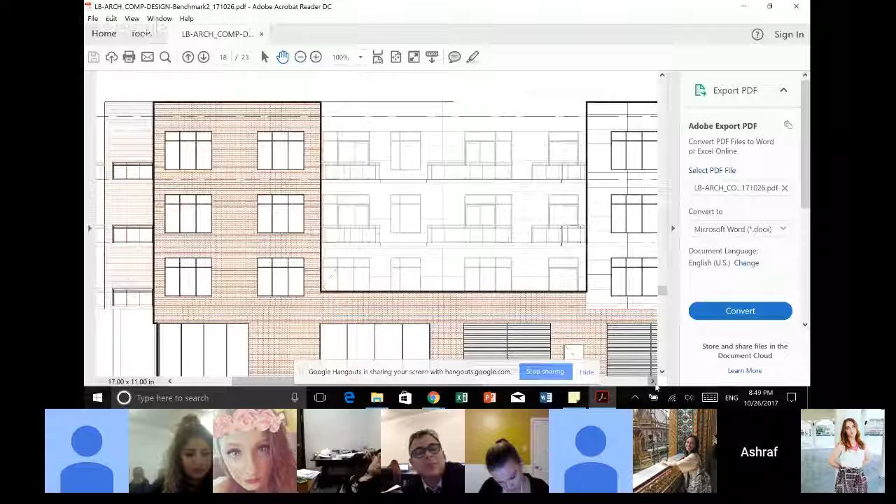Okay, so we cannot do these knees here with the metal panel systems. These are metal, right, if I assume that. I was looking at porcelain. I think I had shared some product. Fine, either, that's fine. But you need to have a nice, more aligned module with

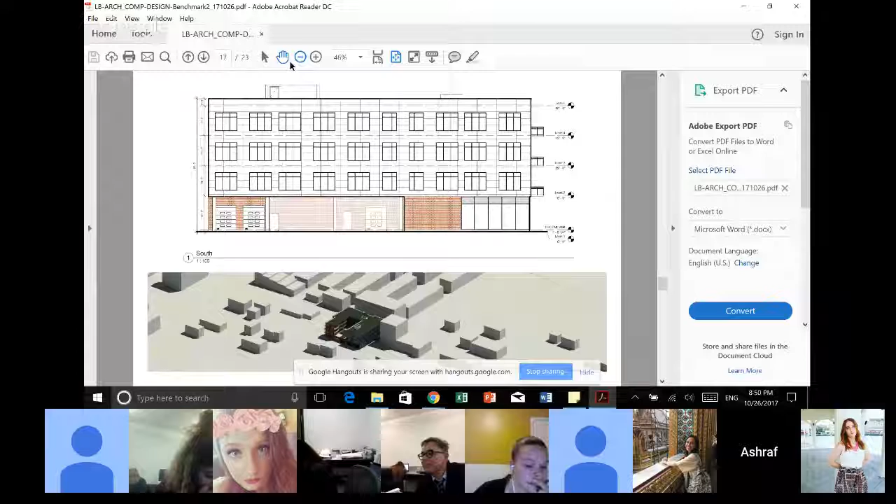your windows here. We don't do these knees, these corners. It has to line up with your horizontal module here, hopefully the vertical too, if you will. So I consider this is a good start if you want to replace this system for maintenance issues. Again, here as well, we cannot do that here, Len. We cannot do this sliver between the window and this horizontal seam here. So these have to line up.

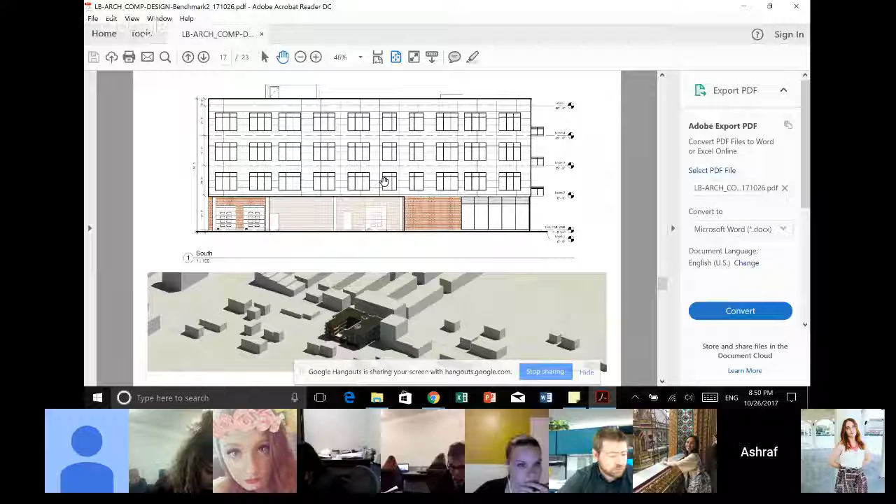Look at the lecture that I posted, it does have it all inside. Some few slides will be off like these, okay, but that's not a good practice with porcelain or curtain wall or metal cladding or wood cladding. They should have a relationship with the windows. Here, that's to me a very good illustrative wall section. I just have this stud is so thick. Okay.

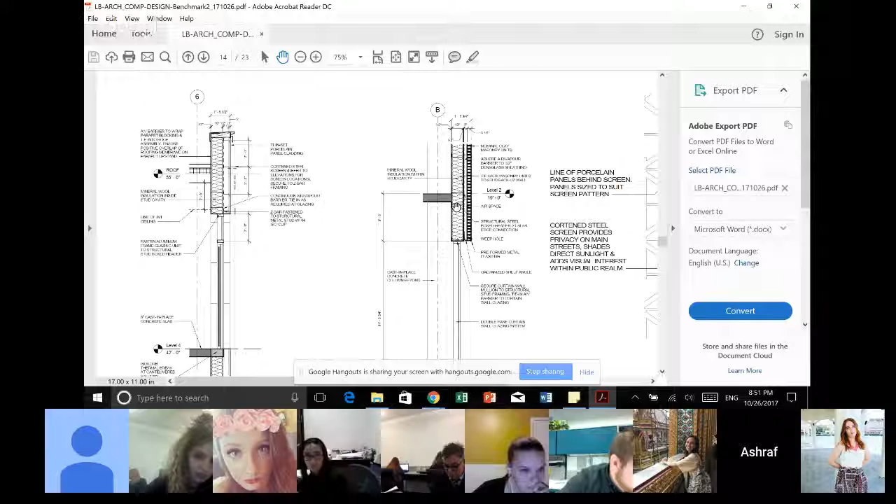What else? I don't think I love this slide too. I don't think I have anything else. Thank you. Okay, I have a quick comment, if I may, Mark.

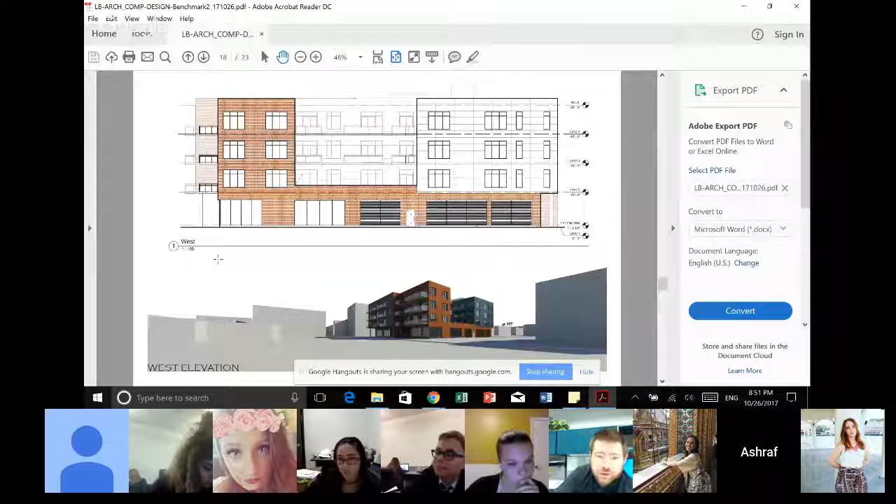Okay, on your parking ramp, it looks like you've only got 6'4" clear. I think if you just get rid of that landing there, then you'd have much more clearance for your vehicles to get down in there. And I don't think the landing's required either. Just something to consider, that's it.

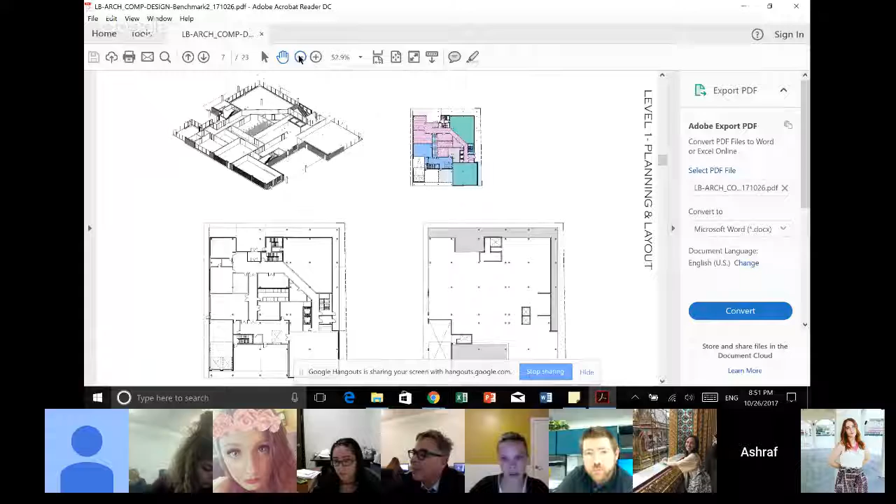Is that what you're looking at on the section? Yeah. No. I think the line is slightly off, but the dimension is too short right now. It should be around 7 feet, but I can reduce the landing. I don't think the landing's even necessary, to be honest with you. But if you want it, then that's fine. But the more clearance, the better.

If somebody's working for Goya or Train or something, they drive a work van, they're gonna have trouble. They're gonna have ladders on top of it or something, and they'll need like 8 or 9 feet to comfortably get down through there.

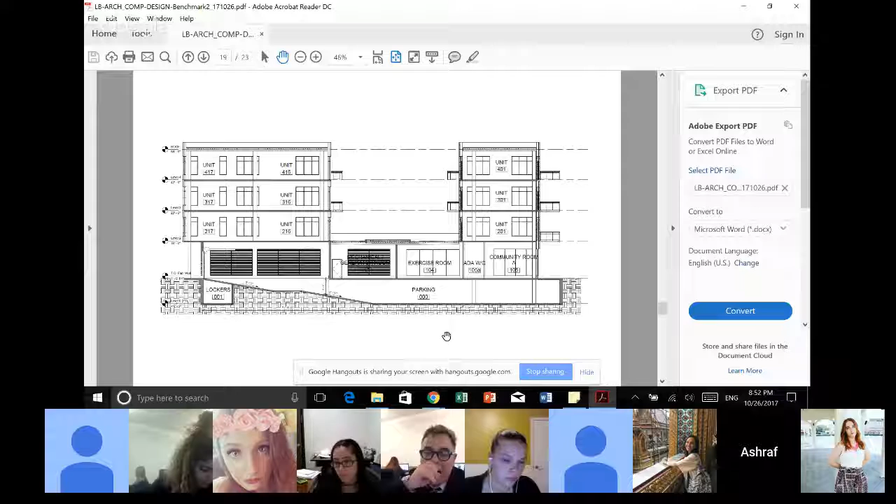Ash, thank you again for the excellent comments. As I mentioned the other night, when Caitlin joined us, and I'm saying it for Lindsay's benefit, this benchmark really needs to sort out the tectonics of the building as it relates to the systems of structure, the systems of HVAC. And that's right where we are. So really good. We're here for both review sessions this week, and so I want to thank you for that.

Thank you, Mark. I'm grading, by the way. I'm grading at the same time, and I'm really unfortunate today to miss your comments because of this damn network problem. I'm really very bothered that I could not hear Lindsay or your comments. I'm really very sad today, but that's not your fault. Yes, but yeah, well, it just cuts every... I cannot hear a complete sentence, I just have to guess the rest.

So I just want to tell everybody that I was grading as well. I'll give you the grading sheets with the rubrics. I'm a little bit of a dictator here in terms of sharing. I don't make anybody... Mark is very democratic, he'll just share, let people share or grade each other. I don't do that here because I have more strict rules, and you will see it in the rubrics. Okay, what you have got in this and what you have got in that, in terms of the 3 systems that we are studying. You may have some extra points for people who walk the extra mile, like Carmen with electrical, or who else did extra work today?